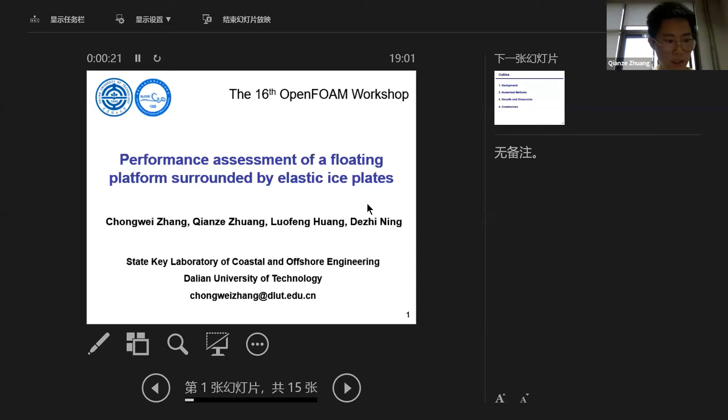Today, the title of my talk is Performance Assessment of a Floating Platform Surrounded by Elastic Ice Plates. The talk will be divided into 4 parts: background, numerical methods, results and discussion, and conclusions.

The oil and gas resources are abundant in the Arctic. In recent years, with global warming and the melting of polar ice coverage, the Arctic marginal ice zone has generally expanded, particularly in the summer. This makes it more accessible to carry out oil and gas operations in the region.

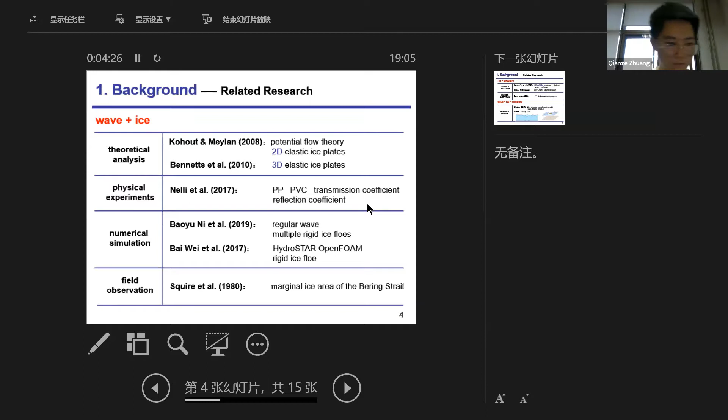At present, for the interaction between wave, ice, and structure, most people use analysis methods. For example, Li solved the problem of wave interaction with a 2D ship-shaped structure in an ice lake based on these methods. In such a context, this research work presents a 2D numerical structure-ice-wave interaction model based on OpenFOAM.

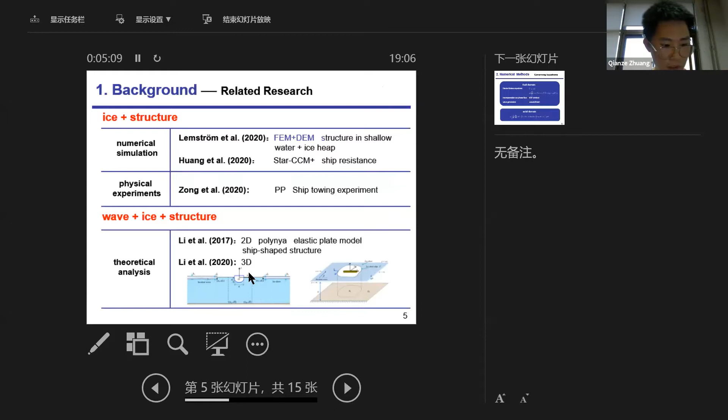Now I will introduce the numerical methods in this work. The two-dimensional incompressible flow model is used to simulate the flow fields, and the governing equation is the Navier-Stokes equation.

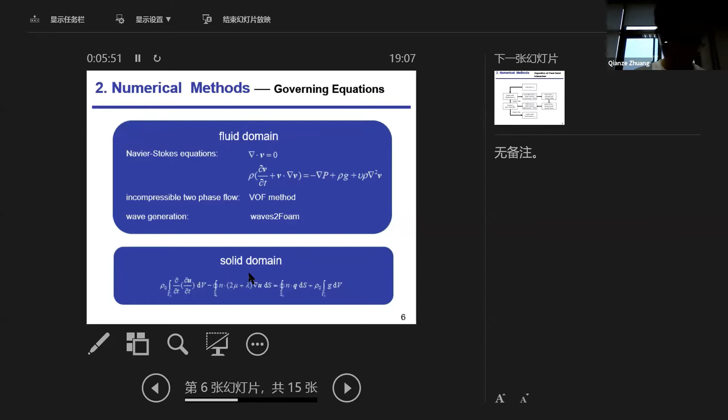In the solid, I use the dynamical equations, and the interaction between the ice and the waves is resolved by using a two-way fluid-structure interaction method. The structure of this method is shown in this figure.

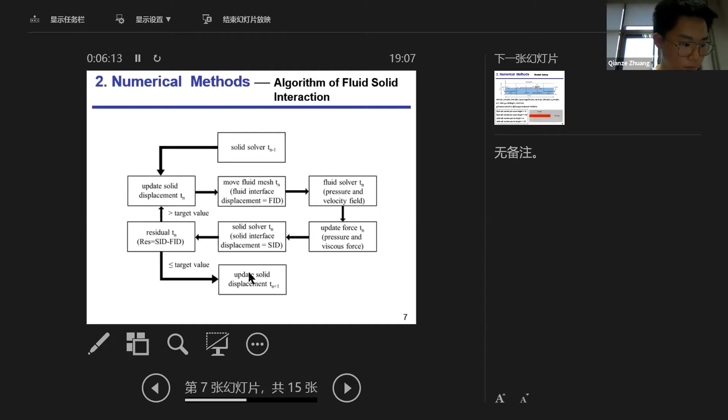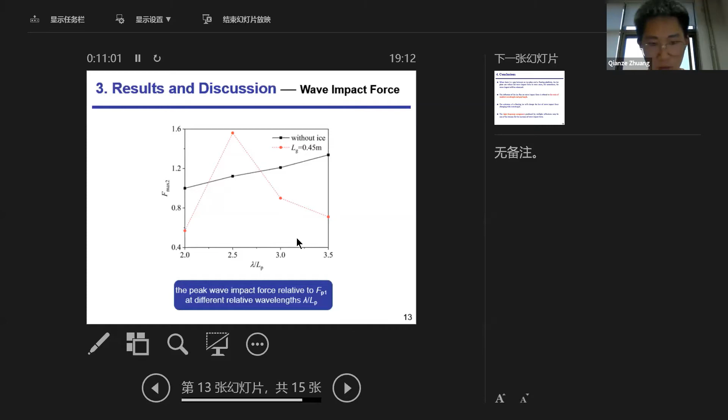Thirdly, the ice floe will change the law of the wave impact force changing with the wavelength. Lastly, the high frequency components produced by multiple reflections may be one of the reasons for the increase of the wave impact force. This capture of the model is... this is all I want to say. Thank you for your attention.

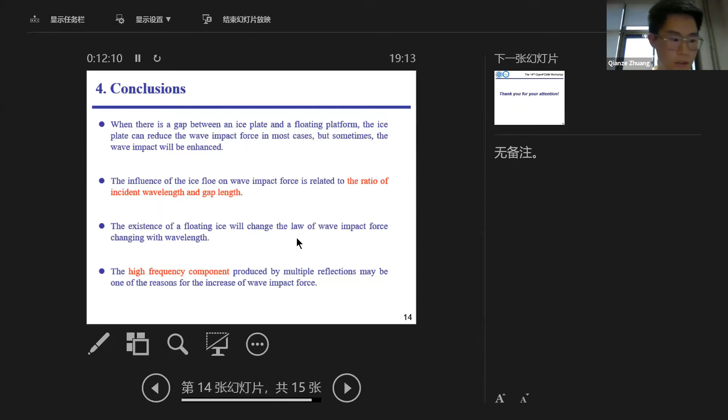The first question is related to the solver you were using for the solid side. Have you used something different than OpenFOAM, or were you using OpenFOAM for the solid? I use OpenFOAM, the foam-extend 4.0. And did you use a solids4foam library, fluid structure interaction? In fact, I use the Vivo FSI foam. FSI, an old version of that library.

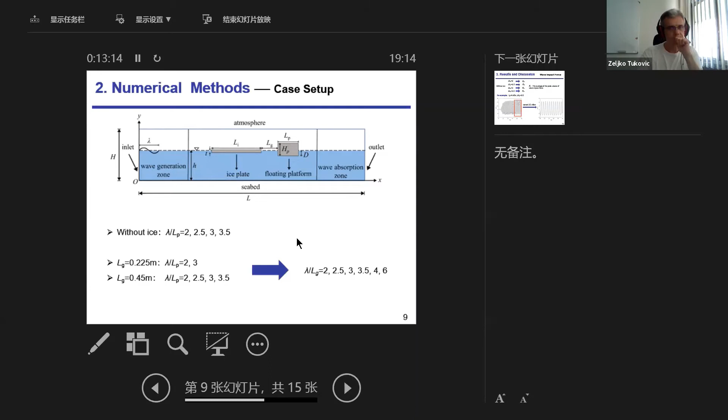One question is related to buoyancy force. Do you calculate buoyancy force automatically? In fact, yes. And this is a result of the calculation, yeah. Yes, and I think I can research more cases.

The last question is related to the initial condition and boundary condition you used for your simulation. Can you tell us a little bit more about this? What were the initial conditions for your calculation? You see this picture.

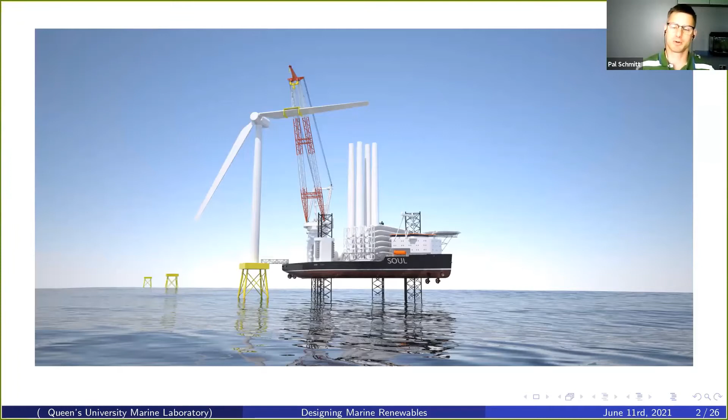And that turbine was actually installed for 8 years just behind my house here. There are other tidal turbines, of course, cross-flow turbines, very complex fluid dynamics, very, very large structures made up of tinier structures.

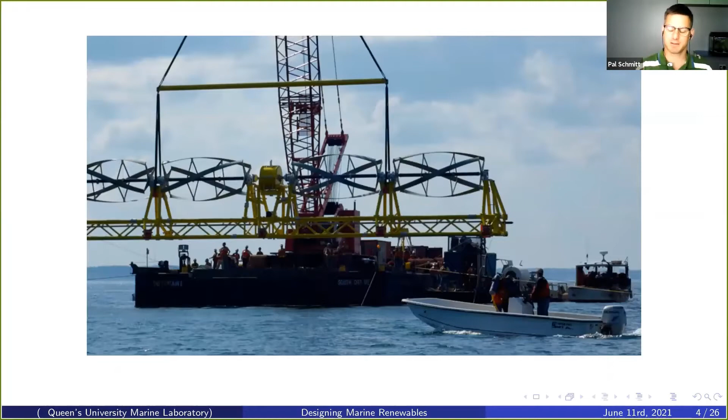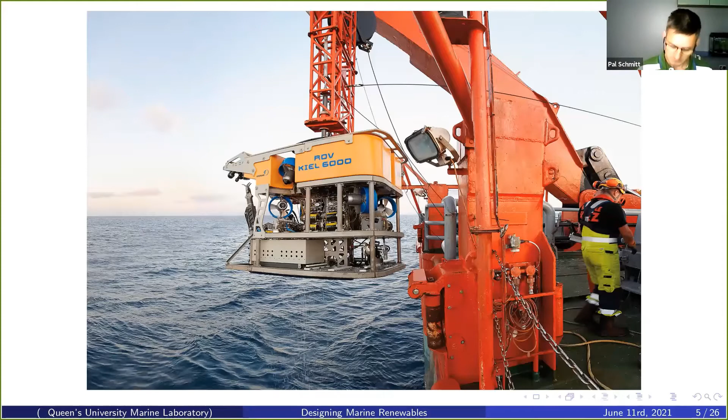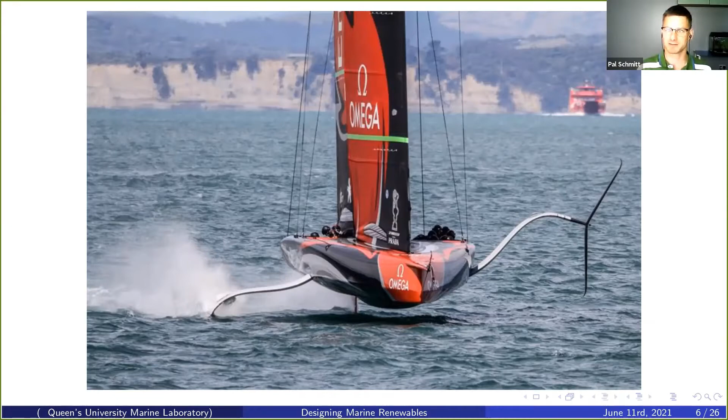We have underwater robots that are mostly built out of cages and then supported by tethers and chains and similar structures. Very exciting if you're into sailing - there's now, well, America's Cup maybe the most famous. There are surfboards that are foiling, there have been foiling ships around for quite a while but it's really picking up now. There are foiling bicycles or water cycles, loads of simulations, and last but not least, also fish cages.

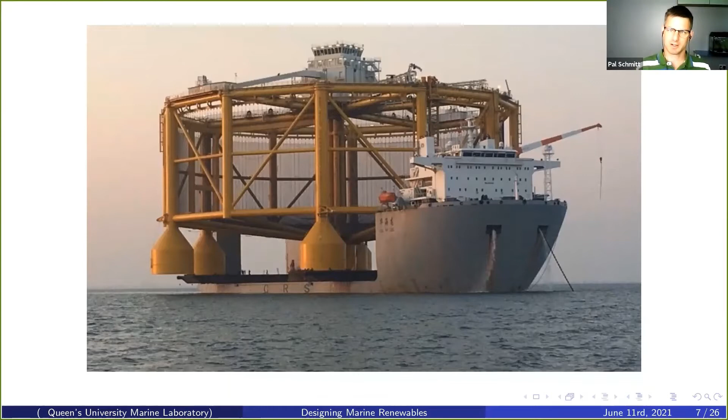Interestingly, it's quite a challenging topic to assess those. If you look at typical technical profiles, for example a simple NACA profile, the typical benchmark test cases at relevant Reynolds numbers tend to suggest you need about 200,000 to 250,000 cells to really resolve them accurately, and that's only for a 2D slice. For most of the structures I showed you before, if you really wanted to resolve these slender structures with that type of resolution, you're talking hundreds of millions of cells, which can be done, but very often it's not really practical in industrial applications.

You always need to keep in mind, if you're doing offshore work, we're talking about the need to resolve length scales on the order of waves or water depth, which is tens of meters. And the boundary layers are then so small that this is really the major challenge.

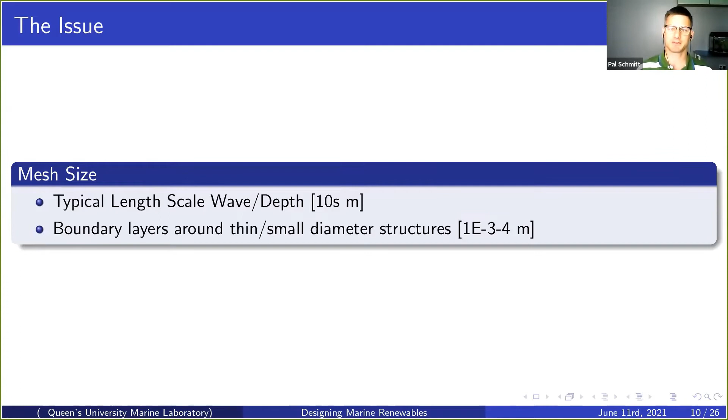One method - I'm not saying it's a one-size-fits-all approach - but one method we found very useful is the actuator line method, where you do not resolve the geometrical feature in detail, but take the forces from a database. Most of these technical profiles are very well defined from experiments, and then you just apply the forces acting on them onto the fluid, so you get the wake correctly and so on.

The pre-processing becomes a lot easier because you don't have to represent your structure in the background mesh, right? That really makes it sometimes much faster. Especially for wind or tidal turbine wake studies, it has been used quite a lot because you can focus all your mesh resolution into the wake coming off.

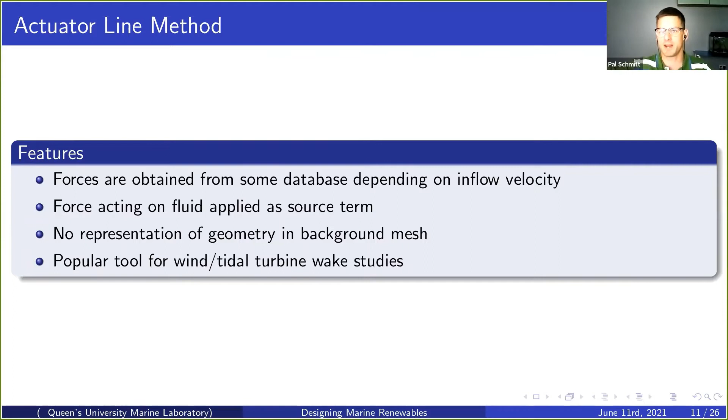So it's horses for courses, but when you look at such a method, the way it really works: the data structure is you define a line and then you have sections, and at certain points you evaluate the section force and get the fluid forces on your structure. As an engineer, it reminds me immediately of a beam element analysis, as probably most of us have done at university or so.

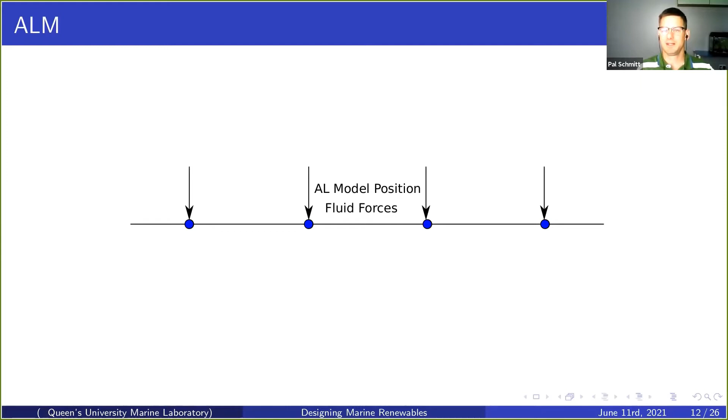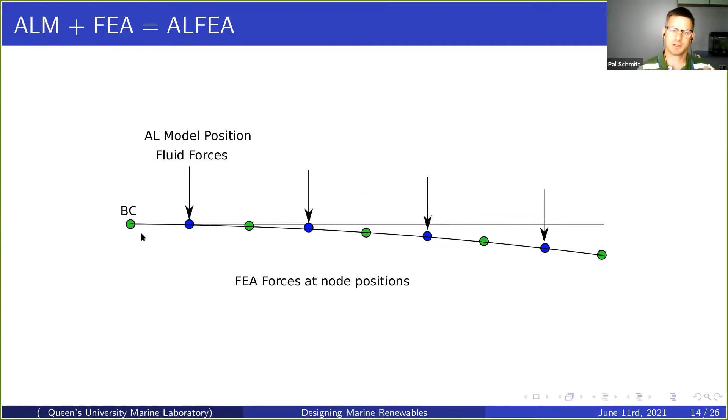Because the actuator line method in itself is very efficient, I found many applications where it would be really useful for me to also take the deformation and the forces in the structure into account. That's why I set out to enhance it a little bit and add an FEA tool below it. The idea is that I get deformations and I can put in structural boundary conditions and simulate that. This is very much ongoing work.

So I took the actuator line model that is quite well known, turbinesFoam, from Pete Bachant - there's a publication from 2018 - and I interfaced it with an FEA tool. After some consideration, I implemented a pure frame analysis, or beam element toolbox. It's currently steady state, but we are already planning to enhance it for transient simulations.

I also picked the Armadillo library. I kind of inherited the FEA tool - it was originally written in MATLAB Octave - and I used this Armadillo library to rewrite it. It's not that much code, so the whole library is a self-contained small unit.

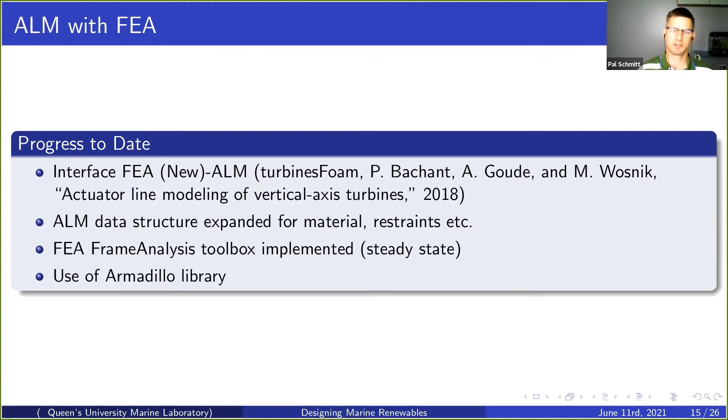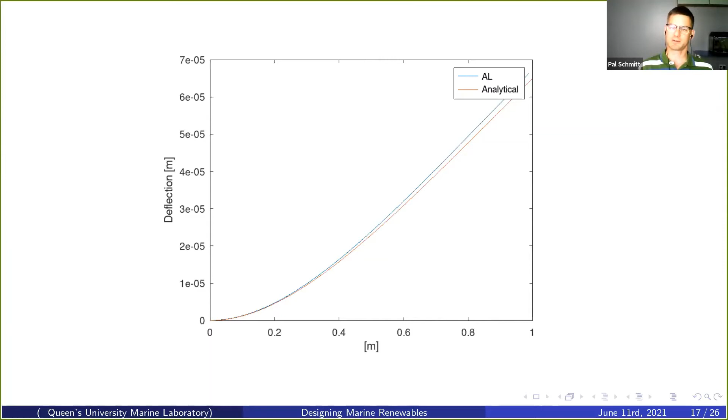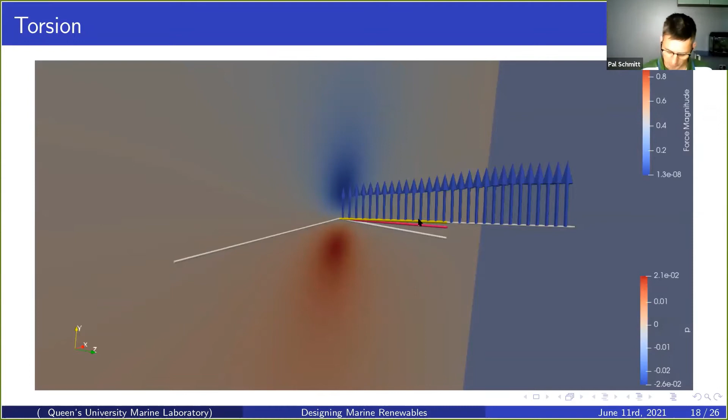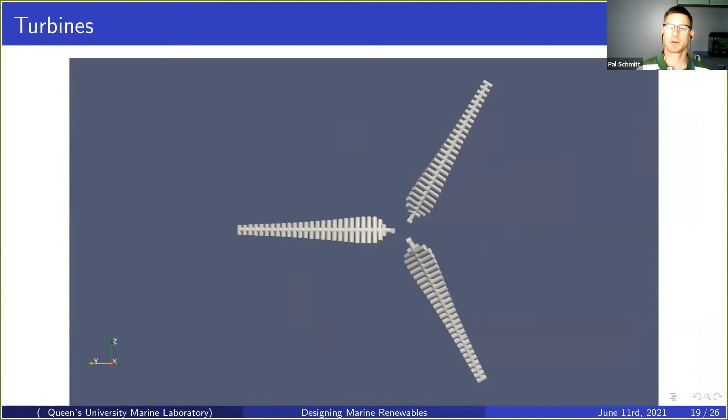So that's some simple validation cases. Of course, the practical applications - and I'm referring now to the start of my presentation - what we are actually working on is, for example, tidal turbines. This could be a turbine. It is still very early stages, but you get pressure at the front.

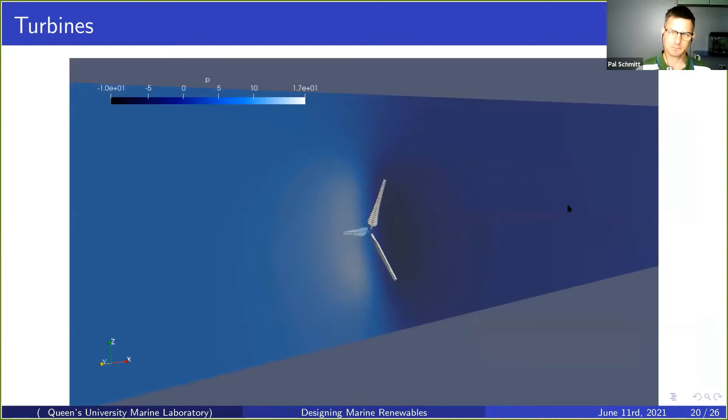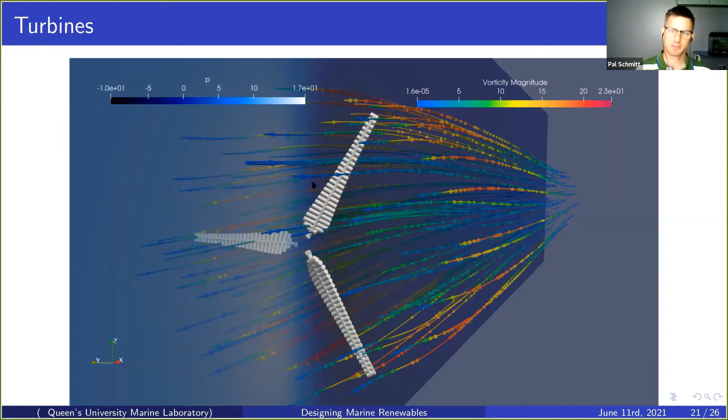So higher pressure at the front, you get the flow swirling around a turbine. That is all the standard actuator line method. And what we can now also evaluate is the deformation of the blade during the rotation.

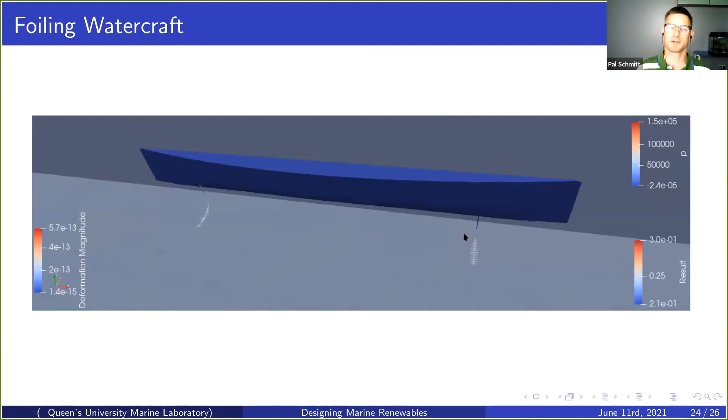Another topic we are interested in - and this example also highlights two-phase flow applications - so that's something we are progressing the validation. This is the famous Wigley hull, of course, and you get a wave pattern around it. And as I said in the introduction, if you want to go really fast, you need to put little foils below it, lift it out of the water, get rid of your wave resistance, and blast along. So this is something we are looking at too.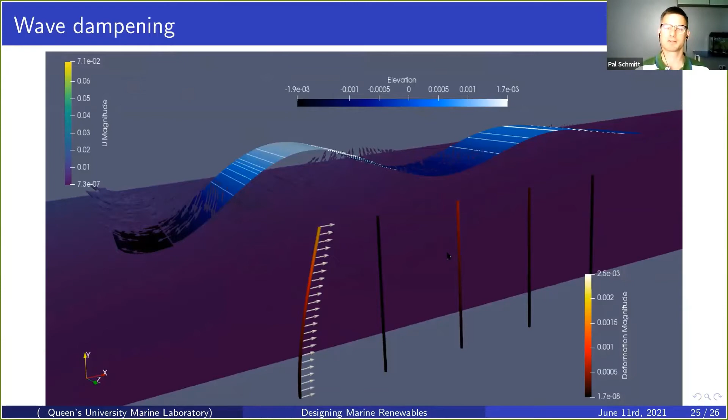So that was a quick overview. As I said, it is work in progress. I'm now working on the transient FEA code and coupling that together. There's quite a lot of debugging to do and profiling of the entire code. So turbinesFoam itself is still under heavy development and is work in progress.

And then I'm really looking at application and validations to offshore problems. A couple of them I showed you just now. One topic that would require a bit on the FEA side is also including bend-twist coupling for turbines. It's quite a popular load shedding mechanism by now - when the turbine is loaded, it decreases the angle of attack by twisting, and that is a structural property. So that is also something we are looking at.

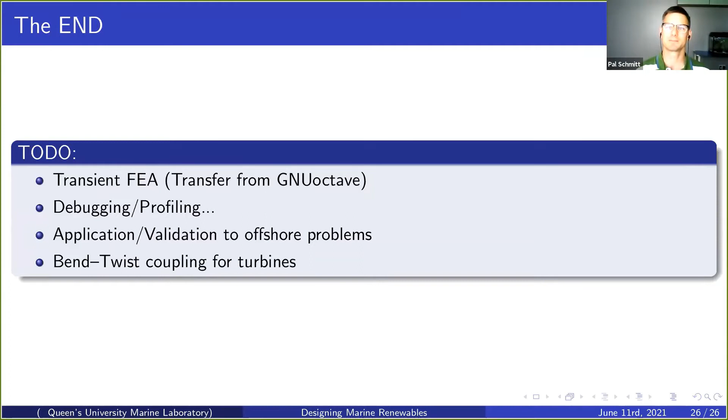Thank you very much.

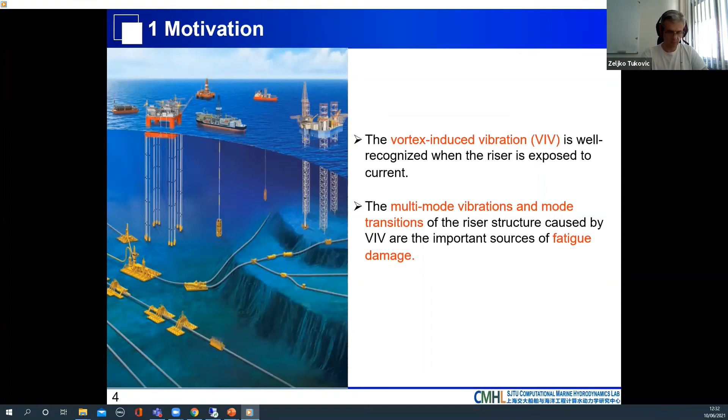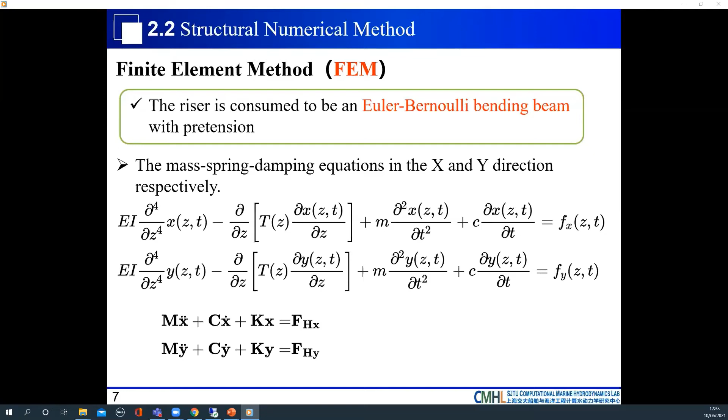Then I will turn to the numerical method. First, Reynolds-averaged equations are adopted to compute the flow field, and the continuity and momentum equations have the following form. The Reynolds stress is computed by the SST k-omega turbulence model. The structure governing equations are solved by the finite element method, and the riser is assumed to be an Euler-Bernoulli bending beam with pretension. The mass-spring-damping equations in the x and y directions are shown here.

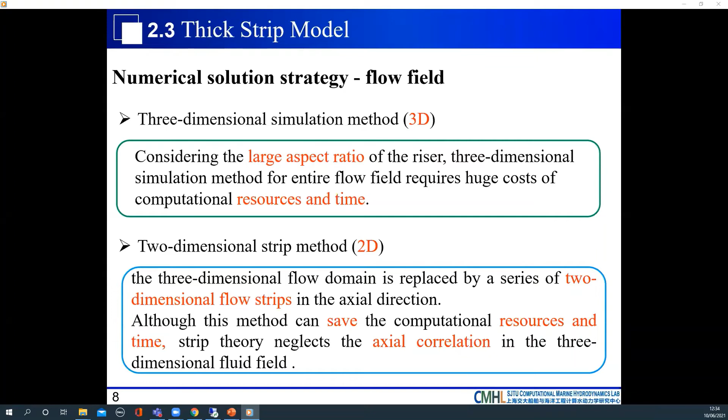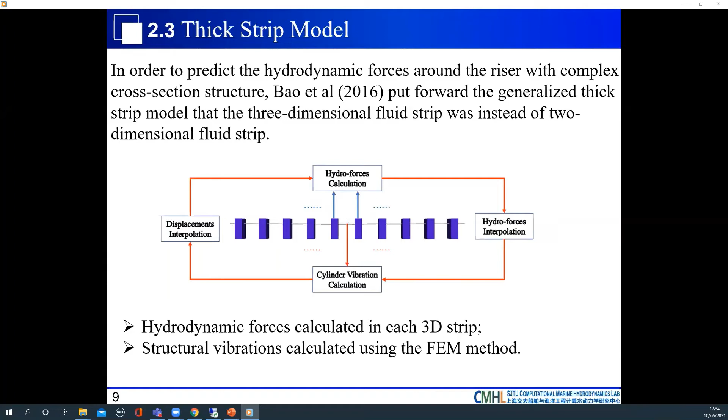In this slide, we compare current numerical solutions for the structure and flow field. The first is the 3-dimensional simulation method, considering the large aspect ratio of the riser - this requires huge computational resources and time. The second is the 2-dimensional strip method, where the 3-dimensional flow domain is replaced by a series of 2-dimensional flow strips in the axial direction. Although this saves computational resources and time, strip theory neglects the axial correlation in the 3-dimensional flow field. In order to predict the hydrodynamic force around the riser with complex cross-section structure, Bao et al put forward the generalized thick strip model where a 3-dimensional fluid strip is used instead of a 2-dimensional fluid strip.

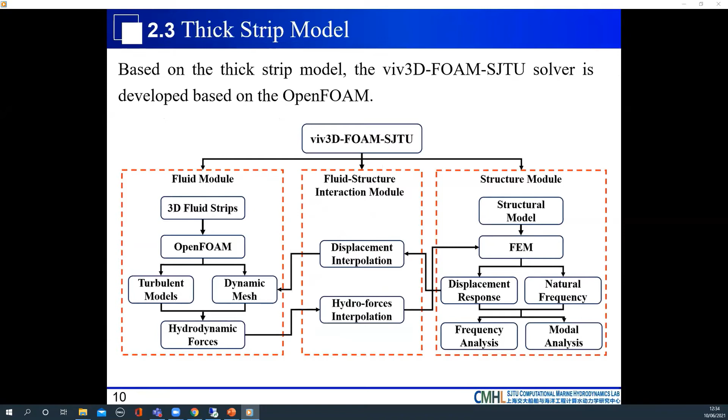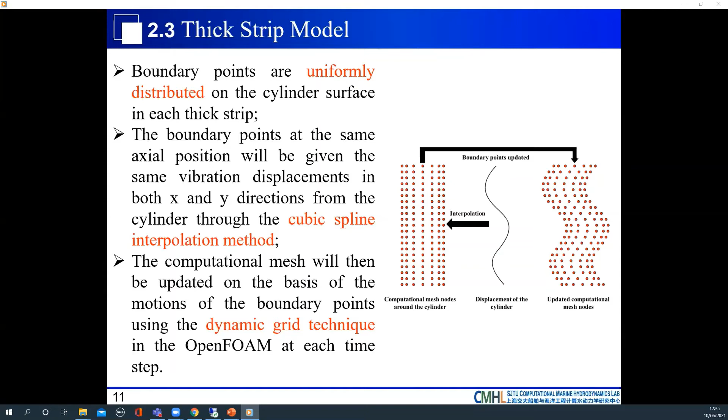Based on the thick strip model, the viv3D-FOAM-SJTU solver is developed based on OpenFOAM, using the thick strip model. The boundary points are uniformly distributed on the cylinder surface in each thick strip, and boundary points at the same axial position are given the same vibration displacement in both x and y directions from the cylinder, through cubic spline interpolation. The computational mesh is then updated based on the motions of the boundary points, using the dynamic grid technique in OpenFOAM at each time step.

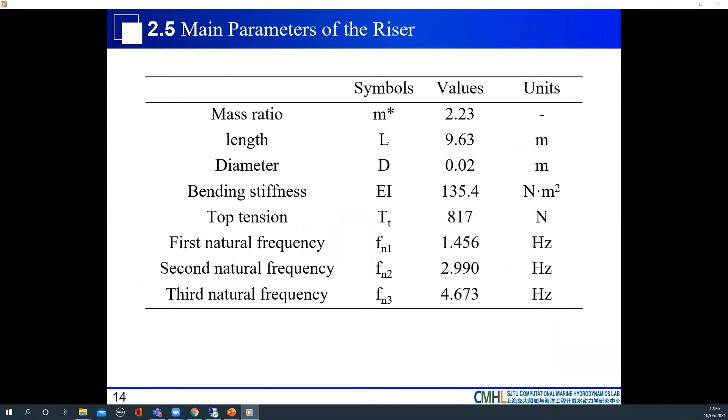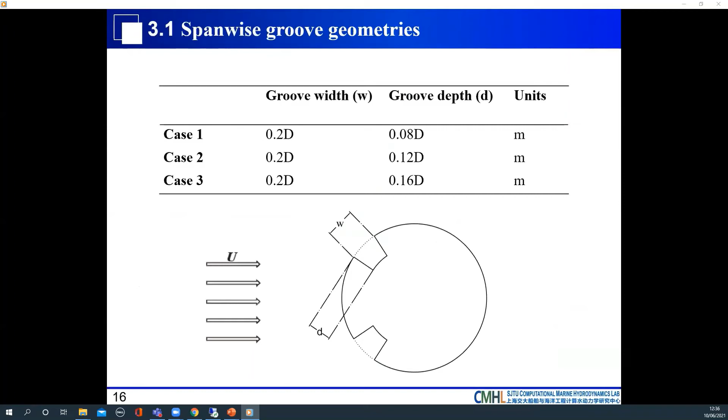This is the main parameters of the riser. Then we introduce the motion results. This slide shows the different span-wise groove geometries.

Figures plot the modal weights of the cross-flow displacements based on modal decomposition method. It can be seen that the dominant cross-flow vibration mode is fixed at the first vibration mode for the three cases. Meanwhile, the amplitudes of first and second vibration modes in case 3 are slightly smaller than those in case 1 and case 2.

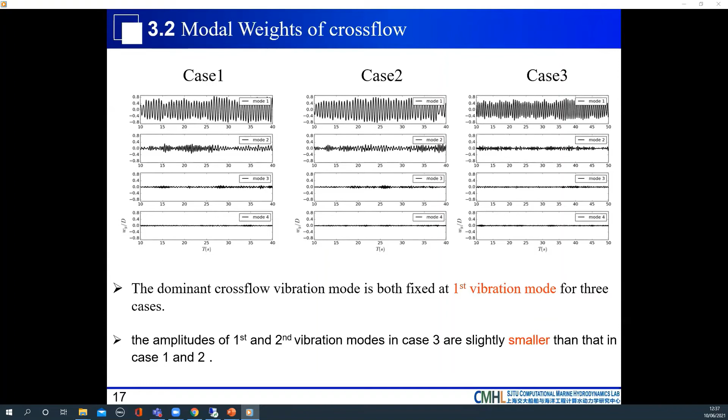Figures plot the modal weights of inline displacements based on modal decomposition method. By comparison of the amplitudes of different vibration modes, the results indicate that the second vibration mode is the dominant inline vibration mode in case 1 and case 2. As the groove depth increases to 0.16D, the dominant inline vibration mode rises to the third vibration mode.

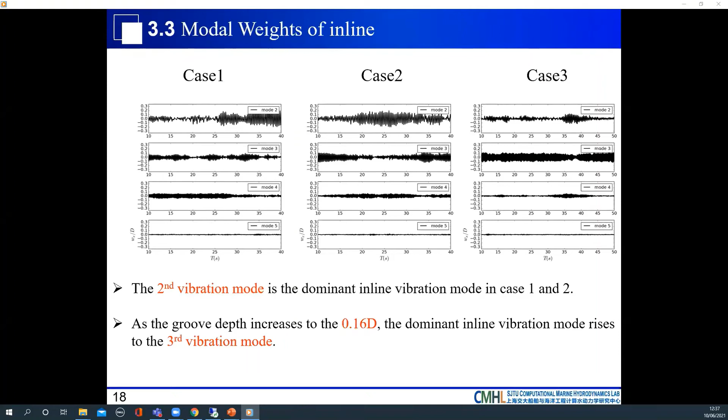The dimensionless root mean square of inline displacements along the riser span are shown in this slide. The amplitude of inline vibration is enhanced with the groove depth increasing to 0.12D. Due to the limitation of riser elongation, the rising mode brings a decrease of amplitude of inline vibration in case 3.

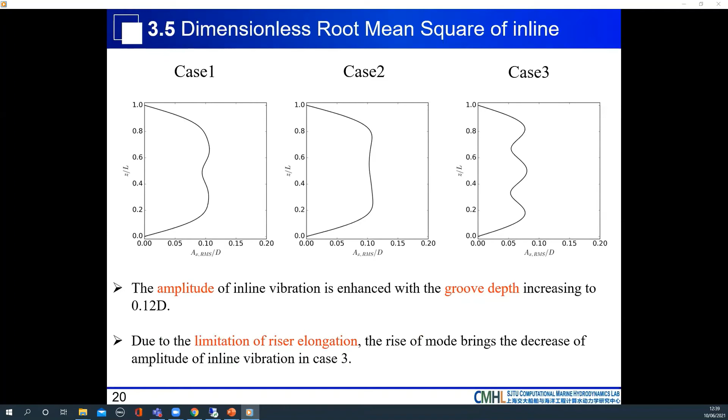The vortex shedding for different times are shown in this slide, and we can see different vortex shedding phenomena at different strips for the same riser. The structured vortex shedding phenomenon is more obvious in case 1, and we know the amplitude of vortex-induced vibration is the biggest in case 1, so it is corresponding.

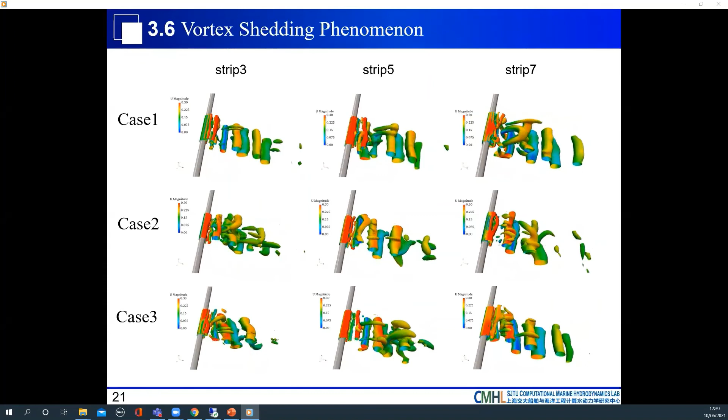Finally, we make some conclusions. The dominant inline vibration modes are affected by groove depths. The amplitudes of cross-flow vibration mode can be suppressed with the increment of groove depths. The different VIV response of the different groove depths result from the interference effects of the vortex shedding.

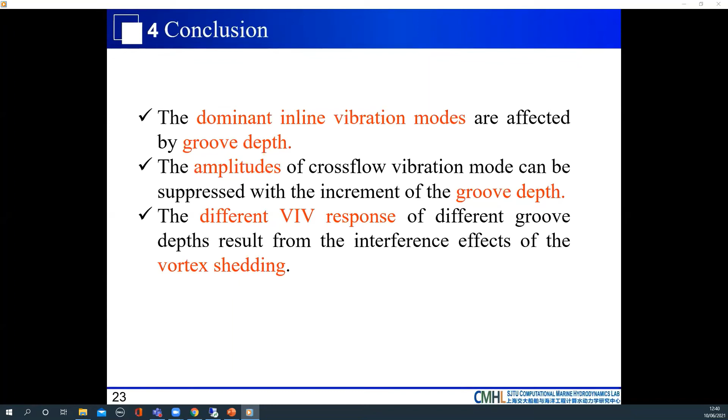That's all. Thank you.

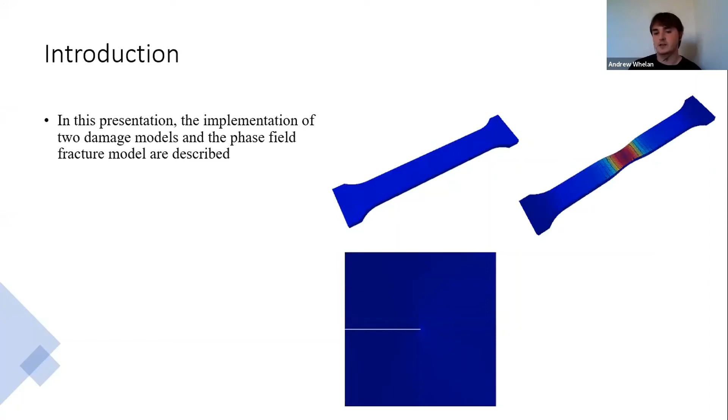Just to give a quick example of what these models can do, here we have a flat tensile specimen, and as it's pulled apart, we can see that the damage model predicts that the damage will occur at the center of the specimen. Here we have a flat square plate with a notch in the middle. We can see that the phase field model predicts that as this square plate is pulled apart from both sides, a crack quickly spreads from the edge of the notch to the edge of the plate.

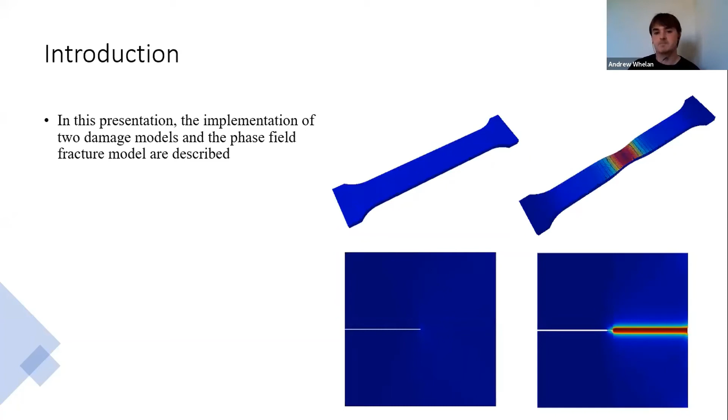To my knowledge, these models have not before been implemented in OpenFOAM, or using the finite volume method more generally speaking. This work therefore serves to extend the capability of OpenFOAM software to simulate these damage mechanics and fracture processes.

So the first model I'm going to discuss is the Lemaitre damage model. In this model, a representative volume element is isolated from a damaged body, and a damage variable D is introduced.

What this damage variable basically represents is, if we look at a plane on this representative volume element, it's equal to the original area of this plane minus the area after cracks and cavities have taken place, over the original area. So D will be equal to 1 in the fully damaged state, and D will be equal to 0 in the undamaged state.

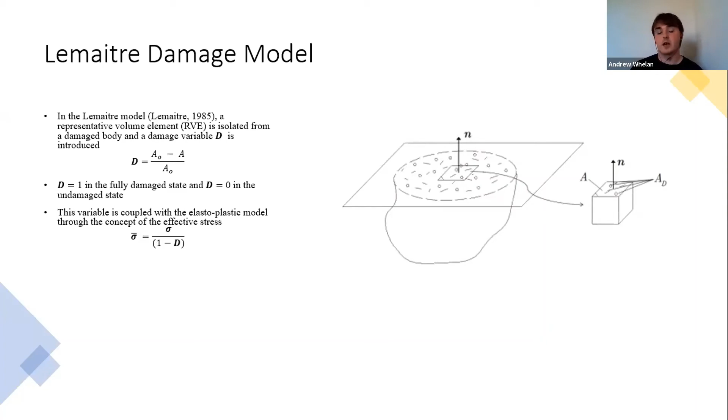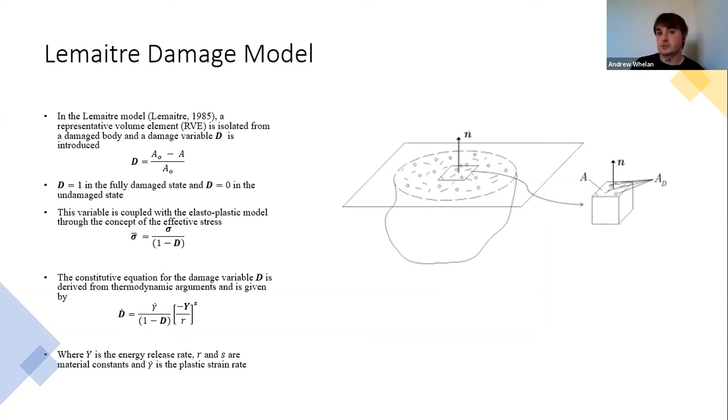This variable is coupled with the elastic plastic model through the concept of the effective stress. The effective stress is just equal to the stress that would exist if there was no damage taking place, over 1 minus D. So the constitutive equation for the damage variable D is derived from thermodynamic arguments and is given as follows, where Y is the energy release rate associated with the damage process, R and S are material constants, and gamma is the plastic strain rate.

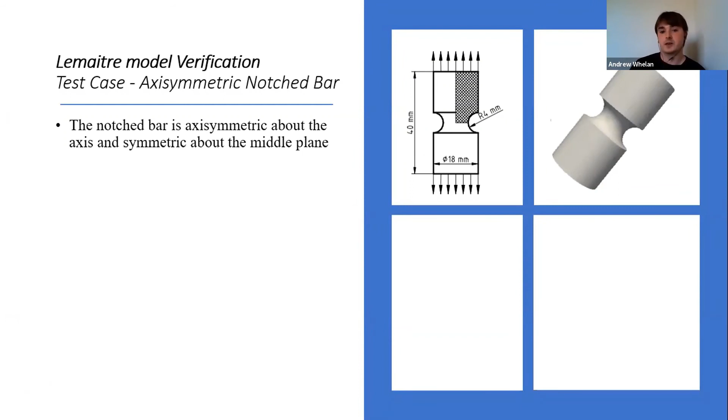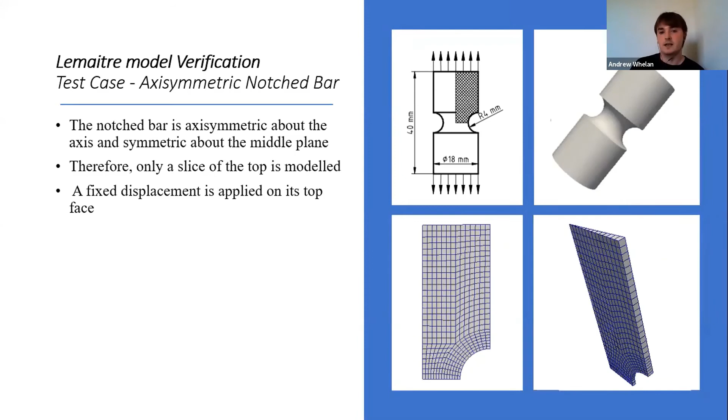To verify the implementation of this case, it was tested on an axisymmetric notch bar case. This notch bar is axisymmetric about its axis and symmetric about its middle plane, so only a slice at the top needs to be modeled, as you can see here in the mesh, and a fixed displacement is applied on its top face.

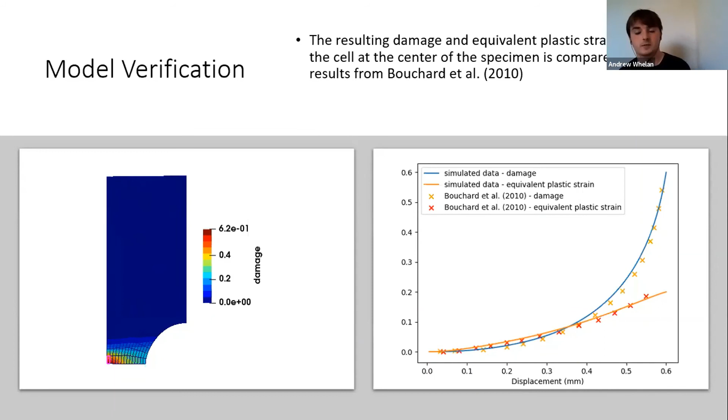The resulting damage and equivalent plastic strain values for the cell at the center of the specimen are then compared with the results from Bouchard et al. We compare the equivalent plastic strain and damage values at different displacement values, and you can see that the results from my implementation and those from Bouchard et al. align pretty well.

So another thing to talk about with these damage models is the phenomenon of mesh dependency. Essentially, one of the major drawbacks to damage models is that they lead to mesh size and orientation dependent results, so your results can change depending on how your mesh looks.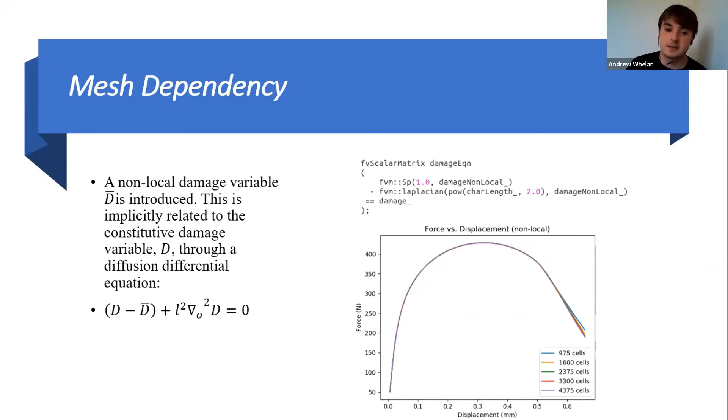The next model I'm going to discuss is the GTN damage model. This model is one of the canonical models used in characterizing the degradation of ductile material. It takes a micromechanical approach to describing the material behavior by positing the existence of micro voids in the material.

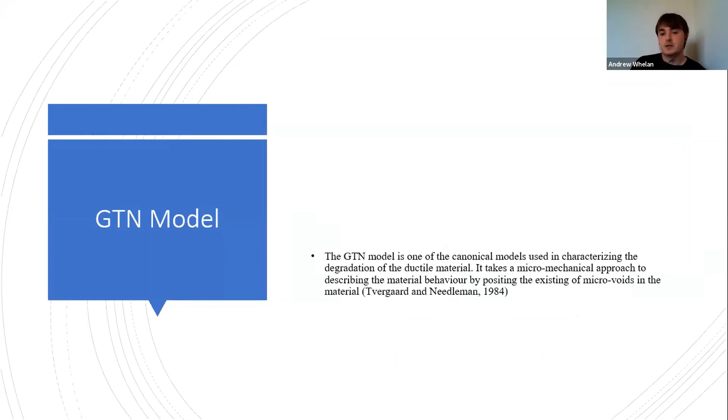The degradation of material occurs as a result of the nucleation of these voids. They then grow and coalesce to form larger scale cracks and cavities. The void fraction of a given volume is denoted by the porosity variable F.

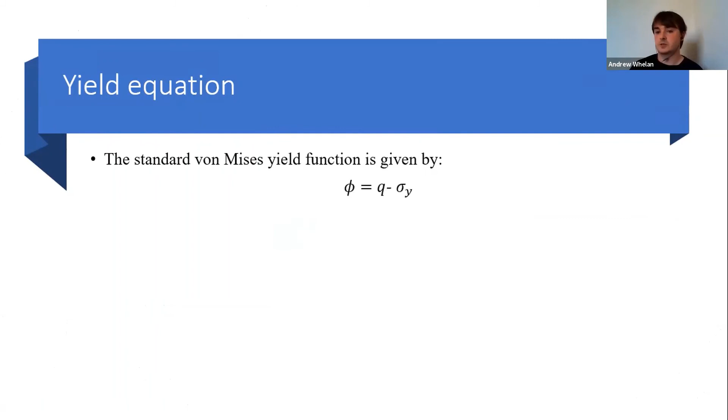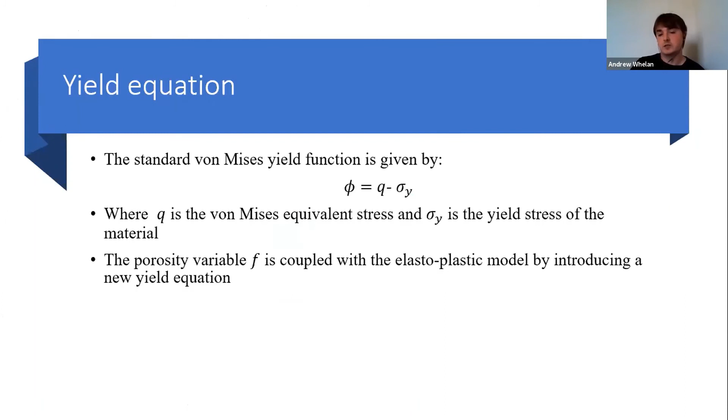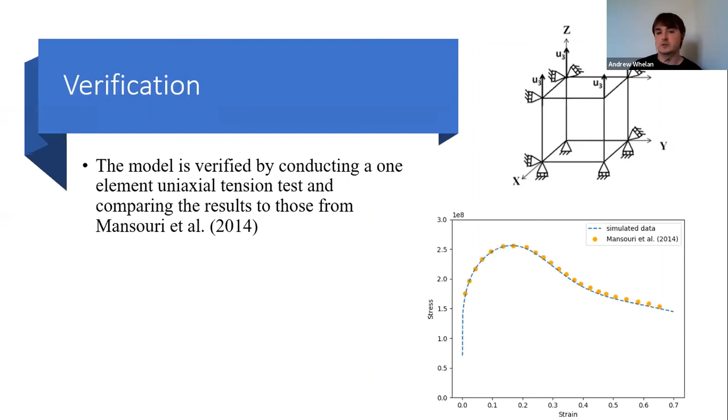The implementation of this model is then verified by conducting a one element uniaxial tension test and comparing the results with those from Mansouri et al. We can see here a stress versus strain graph for the uniaxial tension test, and the results implemented locally in OpenFOAM match up well with those from Mansouri et al.

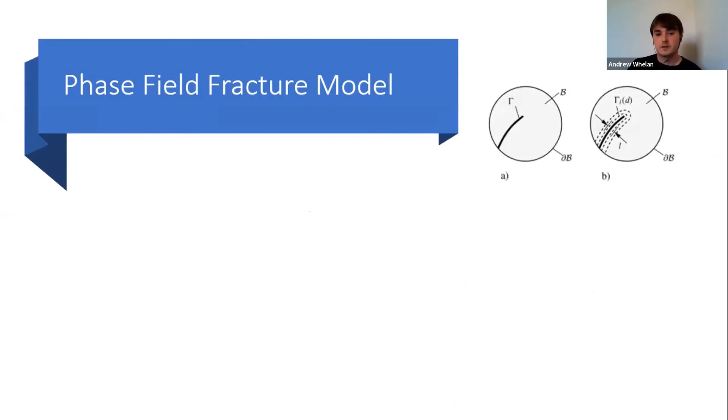So now I'm going to discuss the phase field fracture model. In this method, sharp cracks are regularized over a continuum, leading to a system of partial differential equations that are relatively simple to implement in finite volume solvers.

You can see on the image on the left, in A, we have just the sharp crack, and in B, the sharp crack has been diffused over a larger surface. In this model, the sharp crack can be described by the variable D. For the unbroken state, D is equal to 0, and for the fully broken state, D will be equal to 1.

So the sharp crack topology of the material surface is replaced by the following equation to give us our diffusive crack surface. So it's a phase field equation, I'd say.

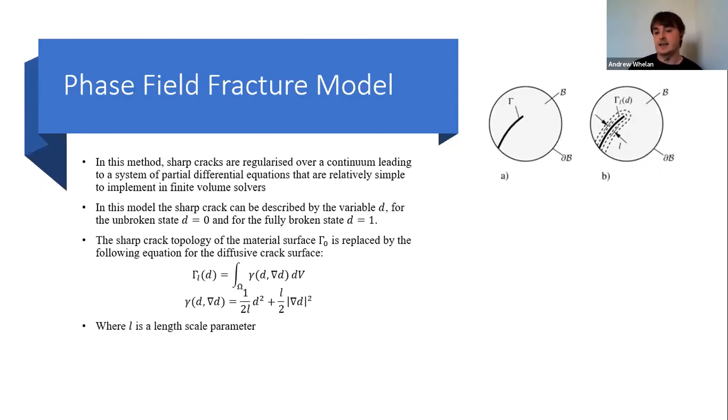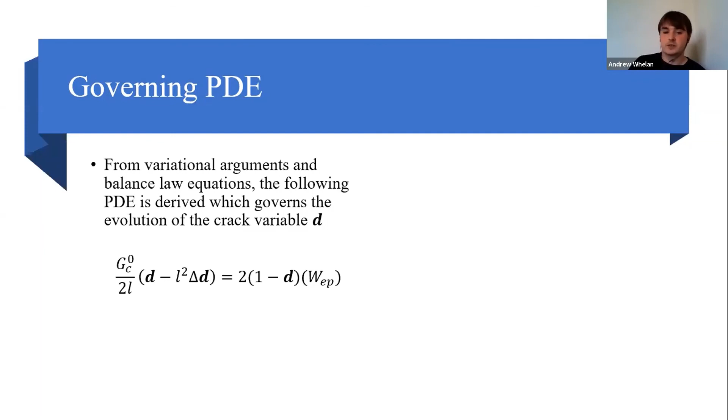So our governing partial differential equation for this model, from variational arguments and balance law equations, the following partial differential equation is derived, which governs the evolution of the crack variable d. That's the partial differential equation that we need to resolve our model. In this model, Gc is the critical fracture energy per unit area, and Wep is the elastoplastic energy contributions. And then again, we see here what this equation looks like when implemented in OpenFOAM.

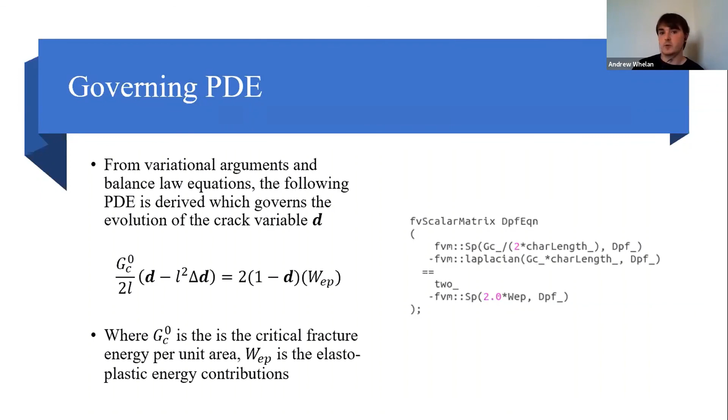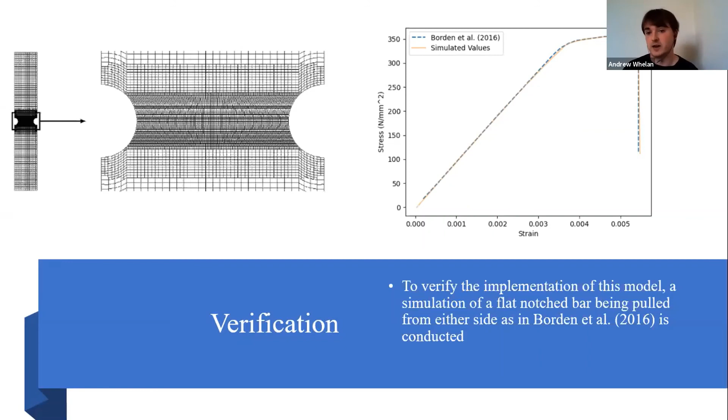In order to verify the implementation of this model, a simulation of a flat notch bar being pulled from either side, as in Borden et al., is conducted. Here we can see a stress-strain graph for this case as it's pulled apart. We can see that the results we get from the local implementation of this model are equivalent to the ones obtained from Borden et al.

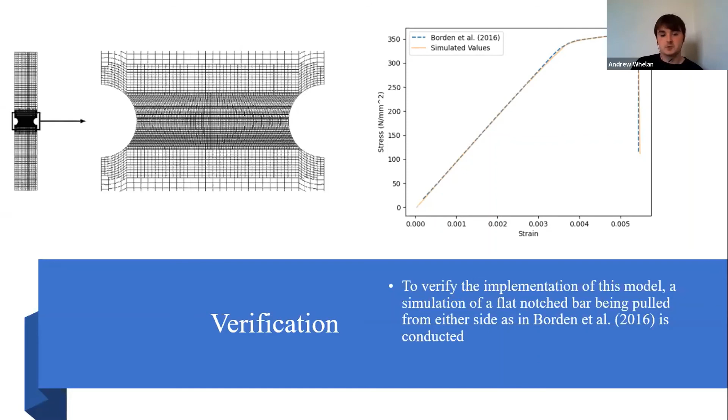Thank you very much for a nice presentation. So I can ask something related to the phase field method. What are actually the boundary conditions for this phase field at the outer boundary of the body?

Just a zero gradient boundary is the one they usually use. There is a little bit of debate in the literature, but at the moment they pretty much just say use a zero gradient.

So then I didn't notice, do you have some source term in the region where the crack will occur? Or sorry, what happens in the crack region actually with the phase field? Do you have some source term there, or?

So the source term is, I suppose, the elastoplastic energy contribution. That's what governs how the crack spreads, if you get me.

Mm-hmm, mm-hmm. And at the moment when this fracture variable, phase field variable, is equal to 1, you will have zero stress state there or something like that.

Yeah, it's sort of the variable d asymptotes towards being 1, and at that point you effectively have zero stress contribution at that region.